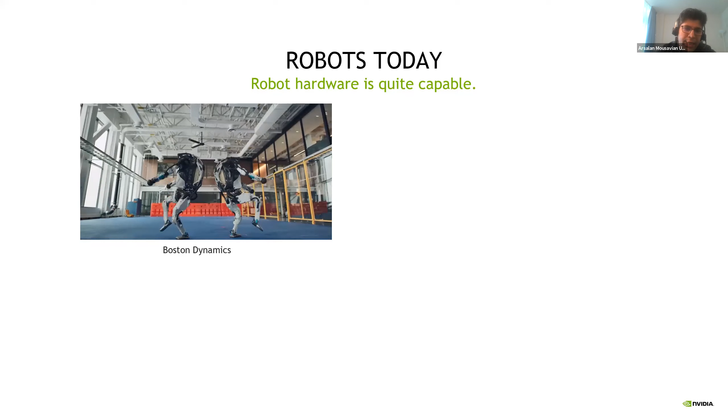So first, let's look at the robot hardware today. We have these amazing platforms that can jump, run, dance, and do all sorts of crazy things. And we also have very sophisticated systems for teleoperating the robot.

Here you can see Jeff Bezos wearing these haptic-enabled gloves, and the robot fingers also have tactile sensors, so he can easily control the robot and stack these cups on top of each other.

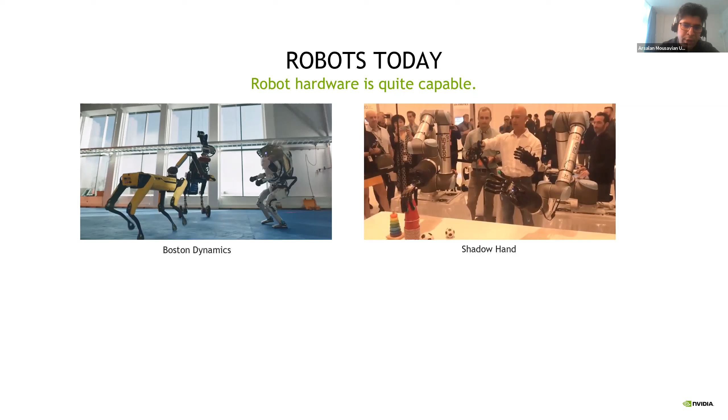In our team, we also have a similar setup, but without any haptic feedback. We have this camera rig, and we do hand pose estimation, and we transfer it to the robot. We can do complicated tasks, such as sliding a credit card on the surface, or opening a box just by getting visual feedback from the human, and also taking out a bill from a wallet.

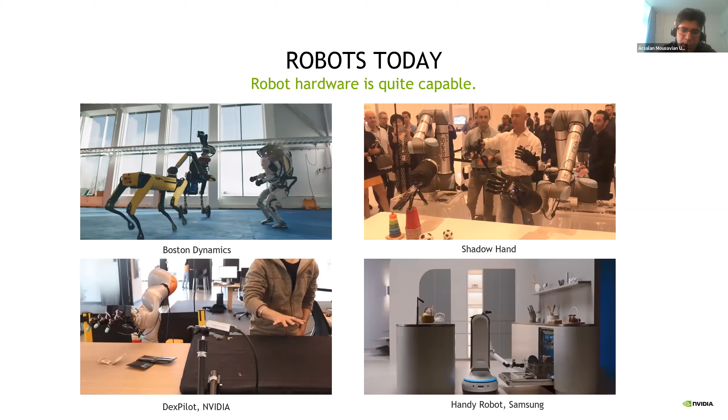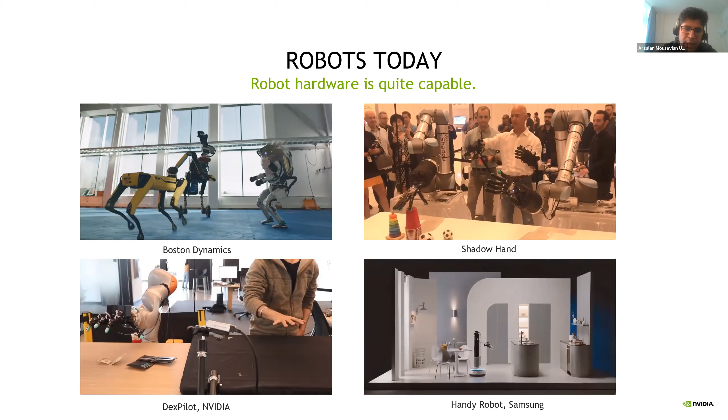There are also very sophisticated hardware platforms, like this handy robot from Samsung. They show that they can do these tasks by doing teleoperation, which means that the robot hardware is capable. But we are still far from having robots in our home.

And in the real world, even in industrial settings, there is a different story. For example, in the beginning, Tesla went all in on using a lot of robots for building the Model 3, and they had to scale it down. Apple also explored manipulation and assembly tasks using robots, and they realized that robots are not capable of doing complicated tasks. This basically presents an opportunity for researchers to work on these data-driven methods to fill in the gap.

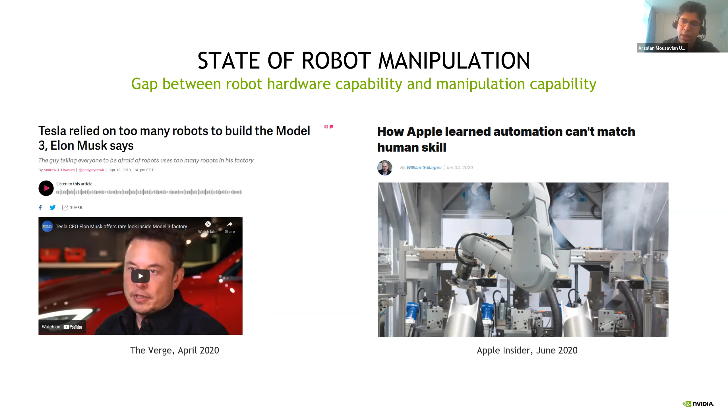So there are different approaches for solving these manipulation tasks. The first category is object-agnostic, model-free methods, which try to just learn a mapping from sensory data to actions. The advantage of these methods is that they have minimal assumptions about the world - you're just interested in the mapping from raw sensory data to action. The whole system is one big monolithic model, so you don't need to spend a lot of engineering on integrating different modules, but you need a lot of training data to train these models, and they usually have very poor generalization to new environments and new objects.

Most of the successes on these model-free, object-agnostic methods are on short-horizon tasks. And the other thing is that there is no compositionality - if the task changes, you need to retrain the model again, and you cannot really use the models on different tasks without any training.

On the other side of the spectrum are the model-based methods, where you say that I have the 3D model for all the objects in the world, and I will just do pose estimation and estimate the rotation and translation of the objects with respect to the camera. So once we do state estimation, we can represent the world with just some object poses, and then we can use classical methods in task and motion planning to solve long-horizon tasks.

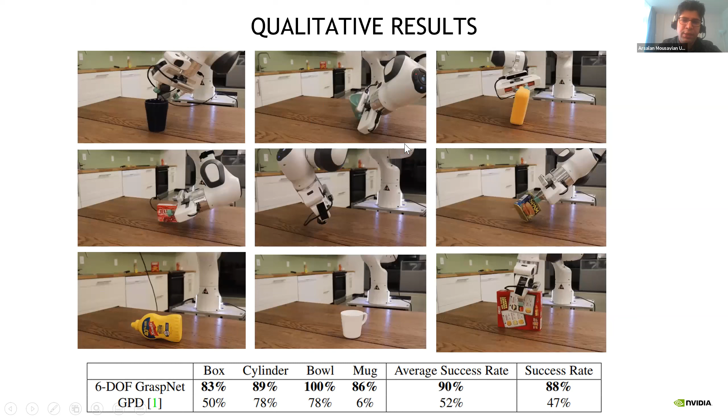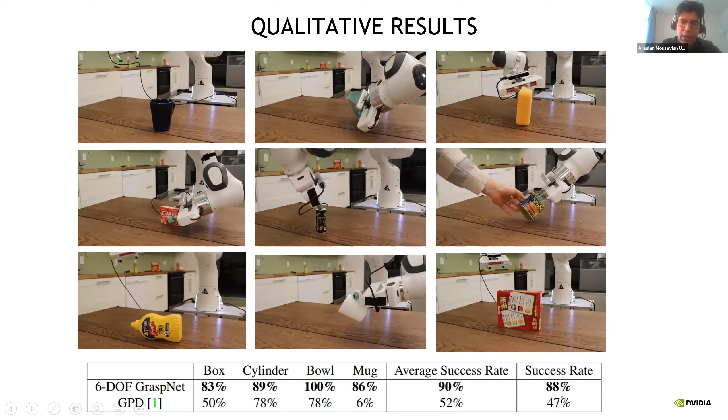So here are the qualitative results on grasping a single object using 6-DOF GraspNet, and we didn't include any of these meshes in our training. So these are completely unseen objects. This model is trained on the smaller scale dataset that I talked about in the previous slide.

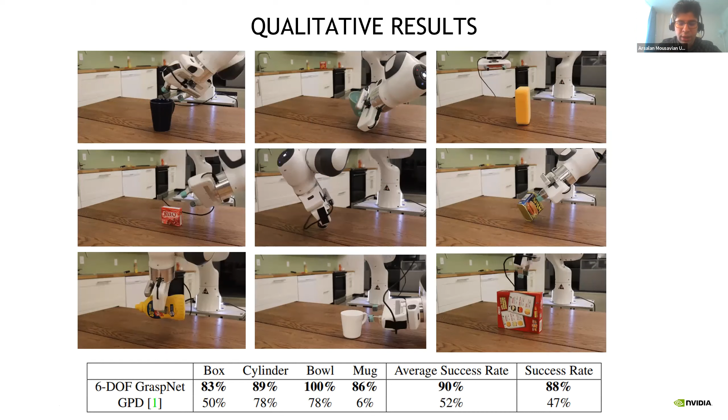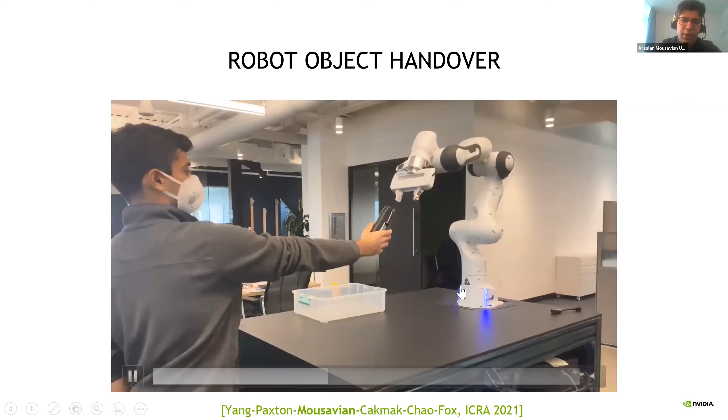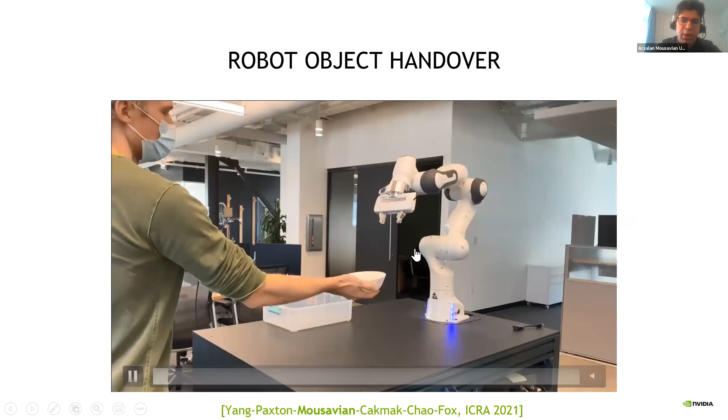We also recently used it in other applications, and we didn't do any retraining for this task. The task here is that the robot wants to take the object from the human hand. The only thing we changed was our instance segmentation, to basically segment the object that is in the human's hand. You can see it can even handle deformable objects, even though we didn't really train on any deformable objects.

But one thing that is missing is that the robot is not going to be only interacting with one object on the board. Robots are usually interacting with cluttered environments. We basically extended the 6-DOF GraspNet to the cluttered setting. So let's talk about this scenario.

Here we have the scene, and we want the robot to grasp the yellow mustard bottle in this scene. We also have the object instance segmentation for this scene, and this is again an RGBD image, which we use for all the methods I'm presenting today.

We project these to 3D, and we basically only consider a small bounding box around the target object, because that's where the object is, and we want to avoid collisions with the objects that are close to the target object. Then we crop the point cloud of the scene to only see the point cloud around the target object.

We use GraspNet to generate grasps for the target object, and we also have an additional model that reasons about collision of these grasps with the other objects visible in the scene. This only reasons about the collision of the gripper with respect to the objects next to the target object. That's how we extended it to cluttered scenes.

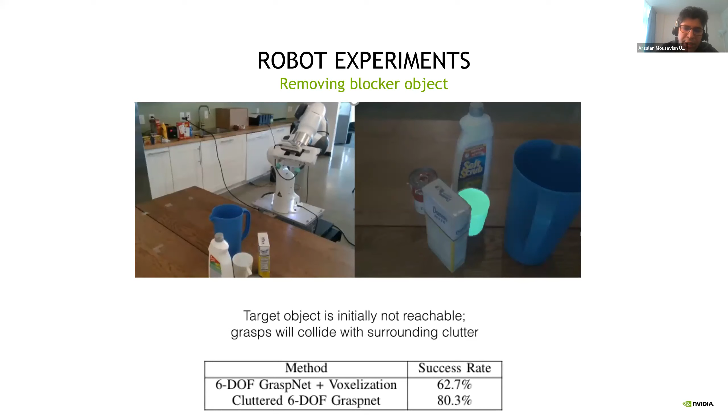So what we do is generate a grasp for the target object, and check the collision of the gripper with the other objects in the scene, and we can do that because we have the instance segmentation of the scene.

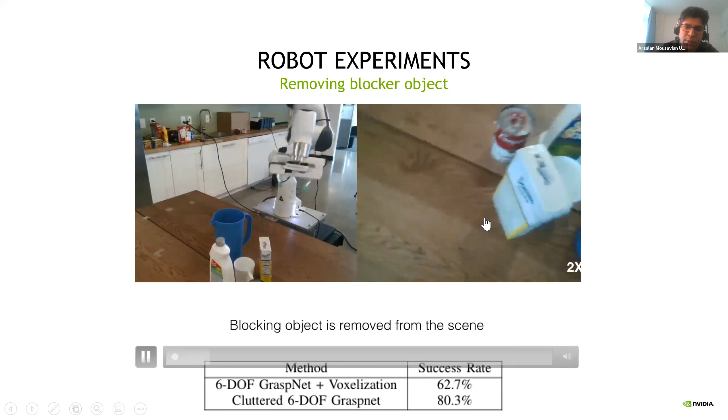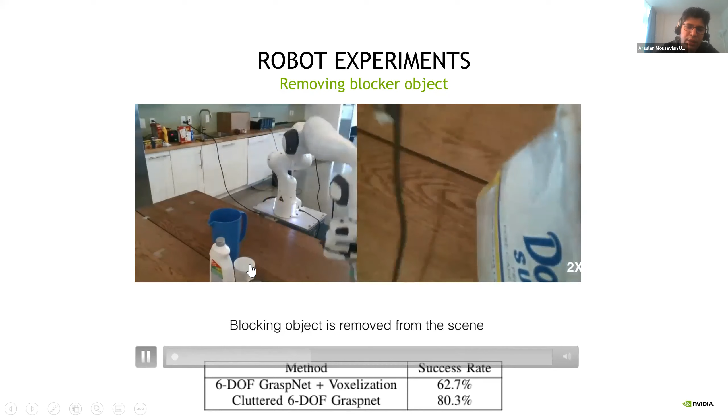Then we can find out which object is the one that is most blocking, and the robot changes the target from the white mug to this sugar box, and moves it out of the way. Then it comes back and realizes it can grasp the object without any problem, and grasps the white mug.

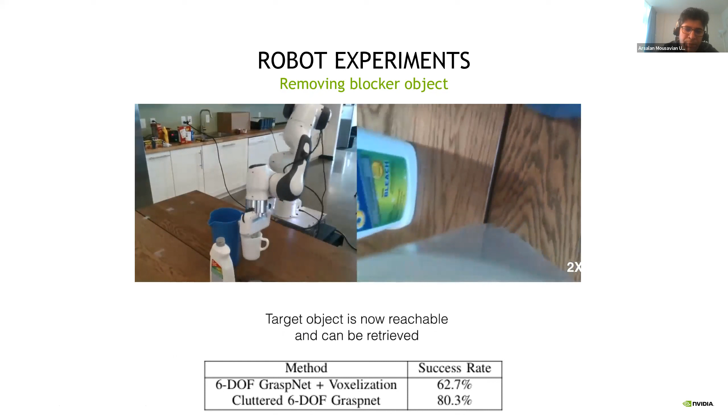We also did a quantitative comparison in the real world with a baseline, where instead of having a learned model for checking collisions, we just do voxelization and reason about collisions, but that performs worse than the learned model.

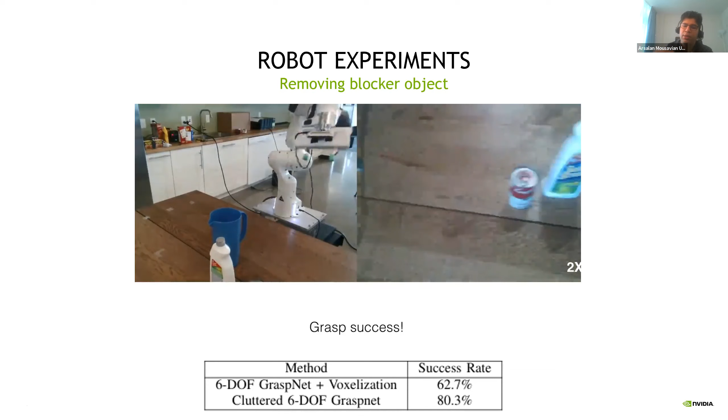One of the reasons is that when objects are packed together, there are a lot of occluded points that are not visible in the scene. Then you don't put any voxels in those regions, and you end up getting colliding grasps.

But there is a question - Arsalan, one second. In these numbers, can you tell us in both cases, does it fail in the segmentation or in the grasp regression? I will get to the segmentation, but this is the performance of the whole system. Yeah, but why does it fail?

So the failures are in two categories. One is that if the grasp is colliding with any other objects in the scene, the robot will make a mess - it will collide with those objects and remove them. The second reason for failures is that sometimes the way we simulate the physics for the ACRONYM dataset doesn't necessarily reflect the friction coefficient happening in the real world.

So we randomized all of that during our training, but there are some grasps that are tricky to succeed in the real world, but in the simulator they work perfectly. So that's... but also the vision is perfect, right? The computer vision is perfect? No, this...

So the predicted grasp can be wrong because either the data is not good, or has some limitations, or the model is not able to fully utilize the knowledge from the data.

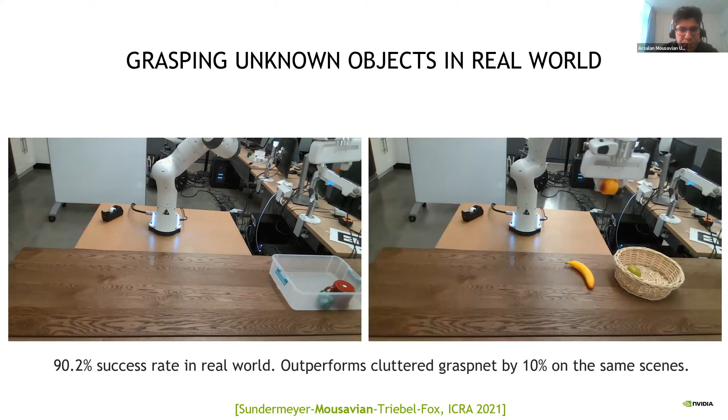So far I talked about how to segment objects, how to generate grasps for them. But the third thing that Kostas also asked questions about is how to do the motion planning. So let me give a formal definition of motion planning in case you are not familiar with it.

In motion planning, we want to find a sequence of valid and collision-free configurations for the robot that gets the robot from configuration A to configuration B. One of the things we need to do in motion planning is to check for collisions, and there are different methods for doing that.

One approach is to do it model-based. We say that we have the 3D model for all the objects in the world, and we do state estimation, and we can check for collisions because we have the meshes for the robot, meshes for all the objects in the world, and we also did the calibration between the camera and the robot.

But that has the limitation that you need to know the 3D model for all these objects. So another way for doing collision checking is to approximate the geometry of the scene through voxelization.

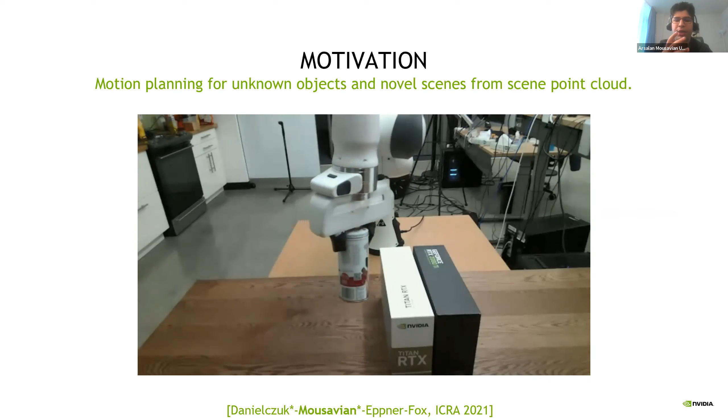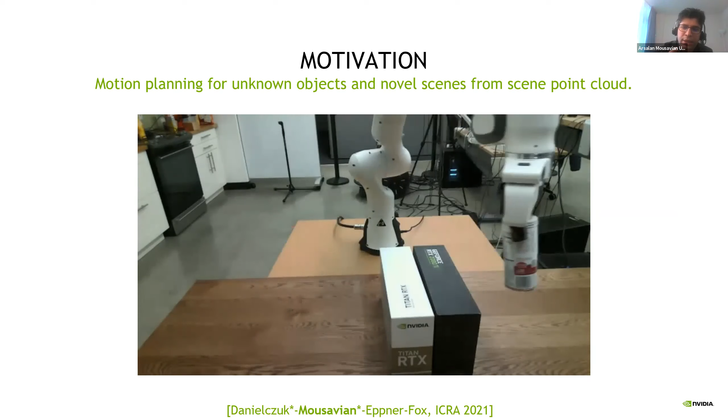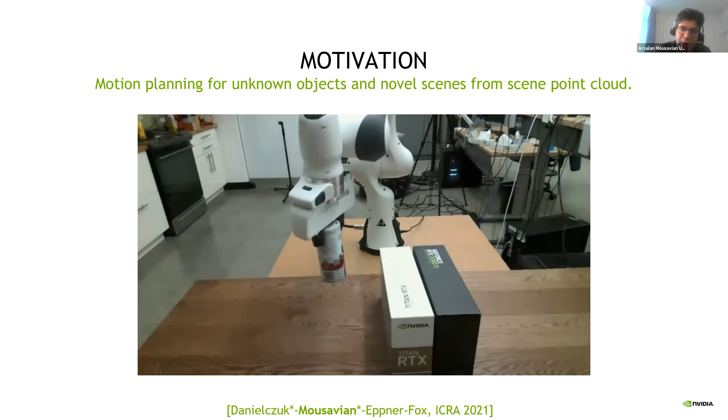But we want to do it for unknown objects and unknown scenes. So here I'm showing a simple example: we want to move this cylindrical object from the left side to the right. As you can see, the robot has to reason about collision of the robot links and the scene, and also the objects and the scene. So we are going to tackle this problem of collision checking and motion planning for unknown objects and scenes.

The first thing we do is, because we did the robot-to-camera calibration, we can segment out the robot by doing nearest neighbor in the point cloud space, and we can remove the robot point cloud. Now we have this scene and this configuration that we want to check for collision.

We can represent the robot by its meshes. This comes from the URDF model of the robots that comes with each robot, which is a very relaxed assumption. And then we can represent each of these robot links with the point cloud for those meshes.

So now basically we represent everything as point cloud. The object point cloud is already in 3D space, and the robot meshes are also in 3D space and are represented by the point cloud for each mesh.

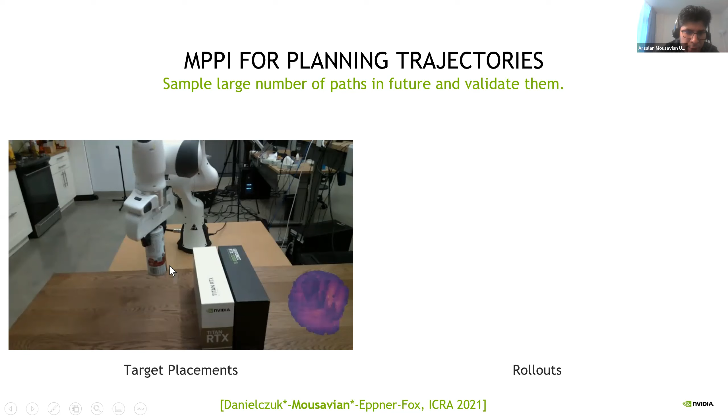So now let me show you how we do motion planning in unknown scenes and unknown objects. Let's say we want to move the cylinder object from here to this purple region on the right.

We first generate different trajectories for the robot in the future. So let's say this is one trajectory, and then we check for collision of that rollout, and we get this trimmed version of the rollout, and then we generate different trajectories in the future. If you look at all these trajectories, this is a visualization of about 100 future trajectories.

How do you generate this collision free? Are they collision free, these trajectories? No. In the beginning they are not collision free, but then we use scene collision net to trim them, removing and trimming these trajectories at the points where the scene collision net thinks they are in collision. So you can see the difference here.

Why don't you use something like RRT here to produce trajectories so you're more efficient? One reason is that scene collision net is highly parallelized, so you want to leverage the fact that it can process a large number of things at once in parallel, but RRT has this sequential process of growing the tree.

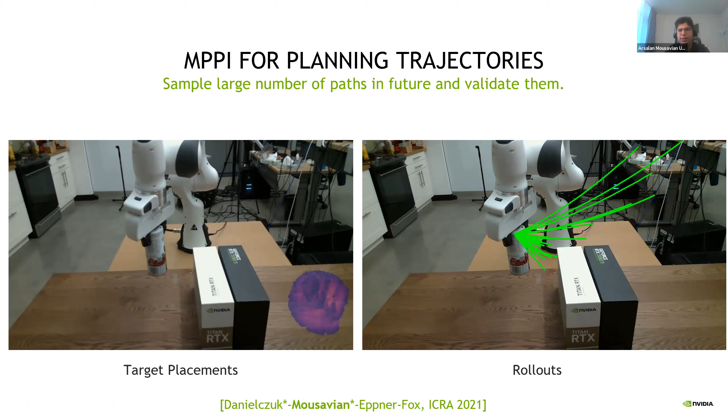The next step is that we score each of these rollouts. The scoring is based on the distance in the configuration space from the current location to any of these points on the right. So the rollouts are highlighted with the scores that we are getting.

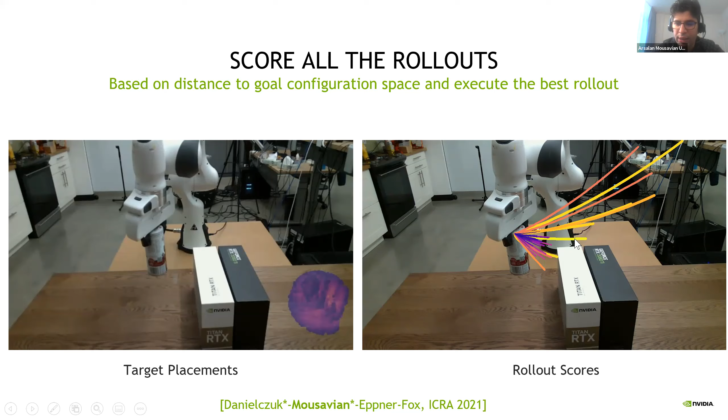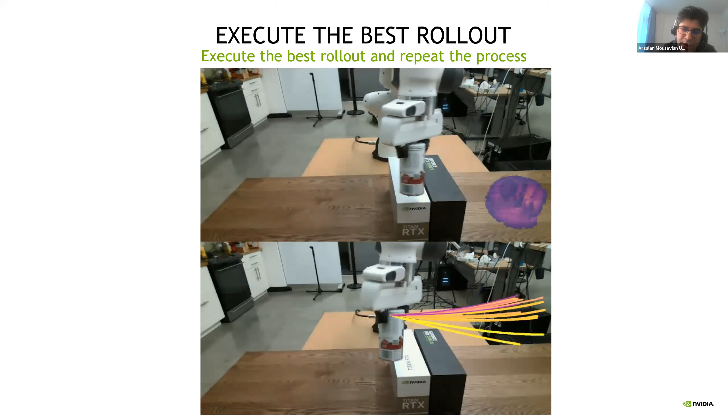And then the robot executes the best action, and we repeat the process at the next time step. So in a sense, our method is fully reactive, taking new observations at each time step.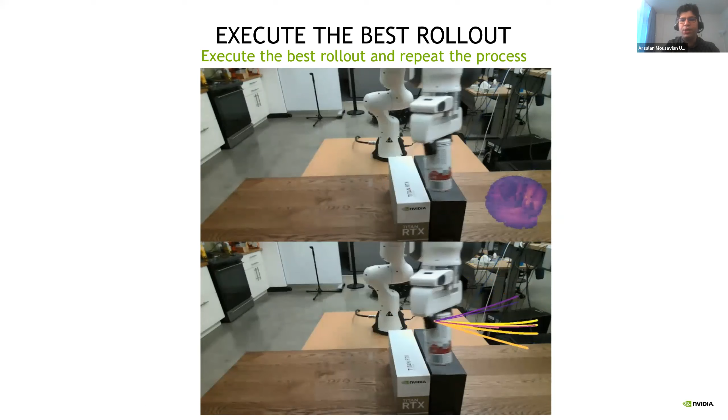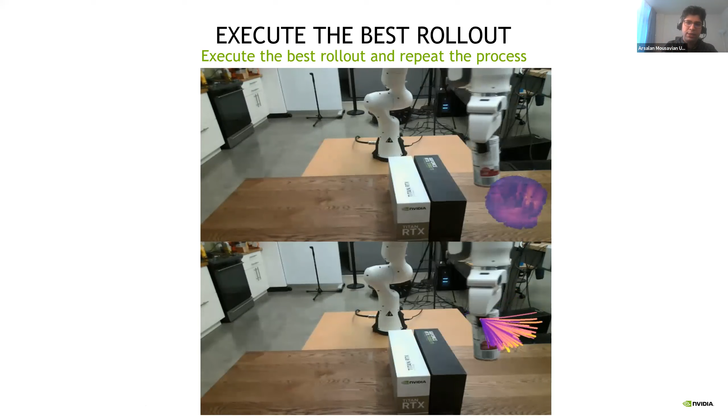It rolls out promising trajectories into the future and executes the best one. Because we constantly get these observations, we can also do more interesting tasks that I'm going to show now.

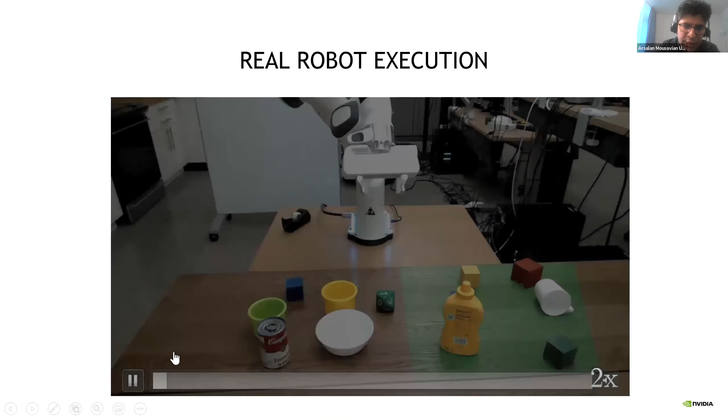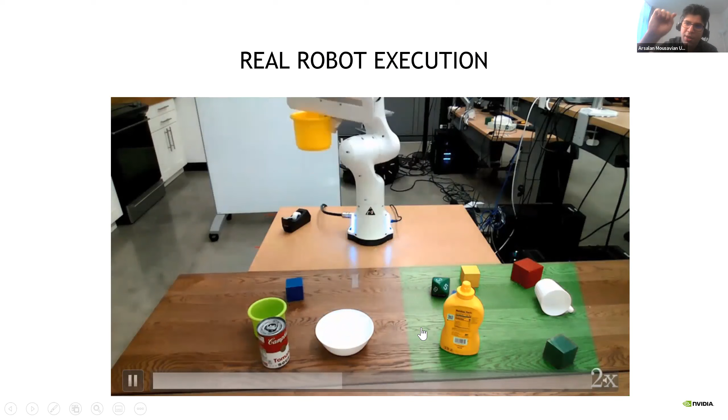Here is another task where the robot needs to pick up these objects and put them in this green zone on the right. This green zone, by the way, is not in the image—we just photoshopped it for visualization. We manually specify this placing region.

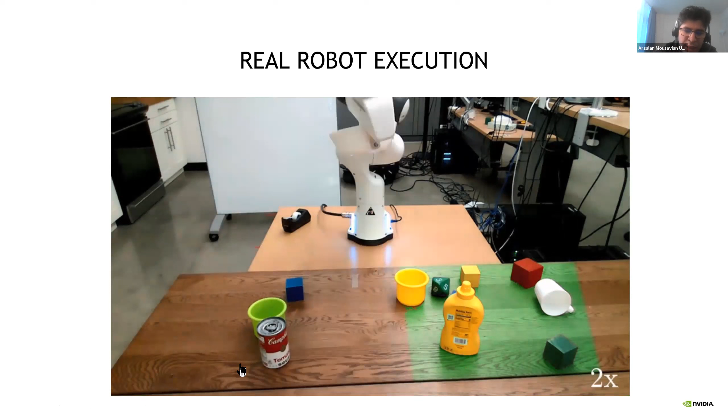The robot grasps these objects and places them into this placing zone. We use this MPPI setting, rolling out trajectories for both grasping and placing. The only difference is that in grasping, the cost function is proximity to any of the grasps, and in placing, it's proximity to any of the placement locations. So basically, we use the same algorithm for picking and placing.

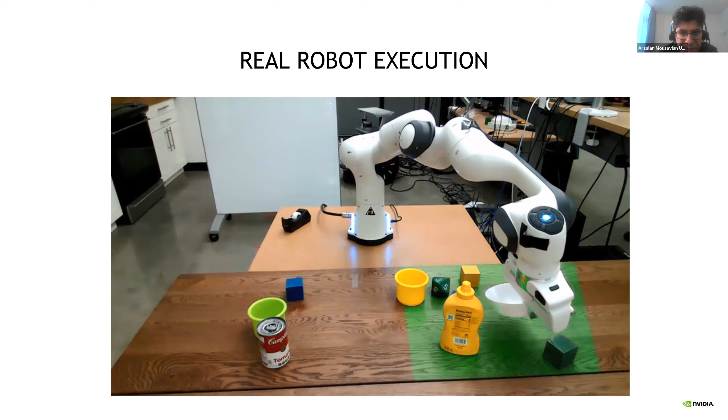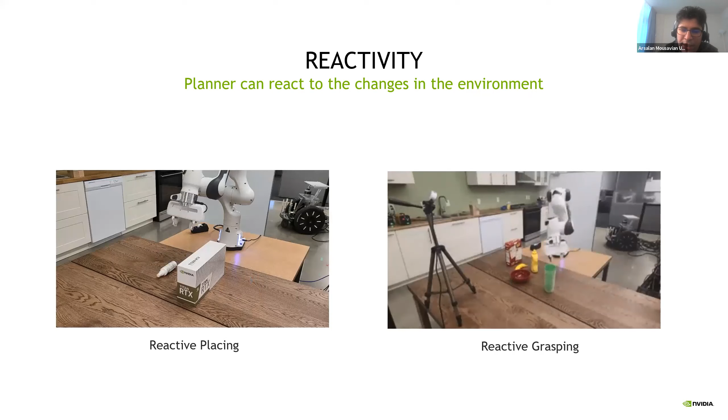Because the system is reactive and constantly takes the point cloud of the scene, it can react to changes in the environment. Here we introduce a dynamic object, and the robot reacts to it and places it in another collision-free location. We can also do it for grasping—initially the robot wants this green cup at a different location, and then we move it to the middle, and the robot follows it and grasps the object.

We are using the instance segmentation that I mentioned in the beginning. For grasping, we use contact GraspNet, and for the planner, we use MPPI with the scene collision net that I just explained.

This is ongoing work and is currently under review, so I'm not going over the details. I just wanted to give a high-level overview of how we can tackle tasks with object-centric models.

What we want is a very high-level task planner that doesn't reason about low-level actions, but only cares about which object to select and where to put it. We feed this information to the MPPI, grasping, and instance segmentation modules to grasp these objects and place them in those areas.